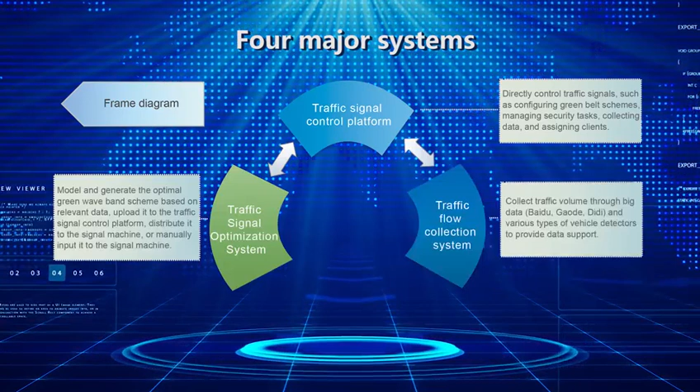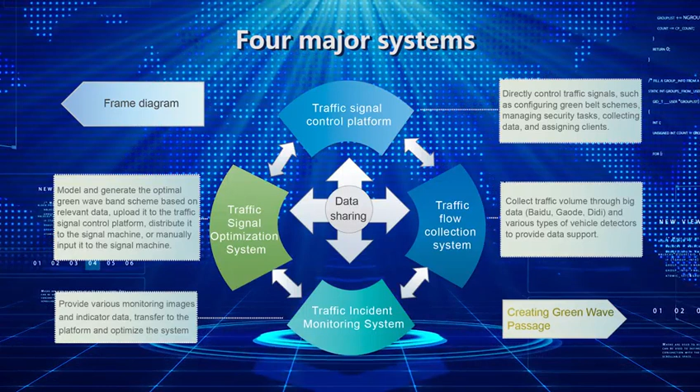The 4 major systems are the Big Data Traffic Signal Control Platform, namely the Super Signal Control System, Regional Coordination Signal Optimization System, Traffic Flow and Green Loss Collection System, and Traffic Event Monitoring System. These 4 systems can be purchased separately for independent operation and use, or can be purchased together for shared database comprehensive use. Our 3 main products are Big Data Traffic Signal Machines, Video Vehicle Detectors, and Leishi Integrated Machines. Some of the products have reached the leading level in China.

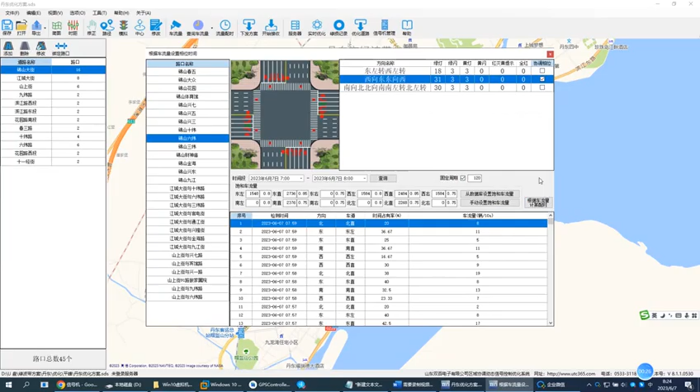Today, we will focus on introducing the Urban Regional Coordination Dynamic Signal Control Optimization System, abbreviated as the Regional Coordination Signal Optimization System, to all leaders. The main function of this system is to analyze the traffic flow at each intersection and on the road, as well as the green loss time at each intersection, generate a reasonable timing plan and send it to the traffic signal, in order to enable vehicles traveling on each road in the urban area to pass in a bidirectional green wave.

This system is developed using cutting-edge core technologies such as advanced 3-dimensional traffic coordinates, green wave phase locking, time misalignment of vehicles passing through intersections, and spatial misalignment of vehicles passing through intersections. Our company's Regional Coordination Signal Dynamic Optimization System has reached the leading level in China, that is, the first level in China, and has passed the appraisal of national scientific and technological achievements.

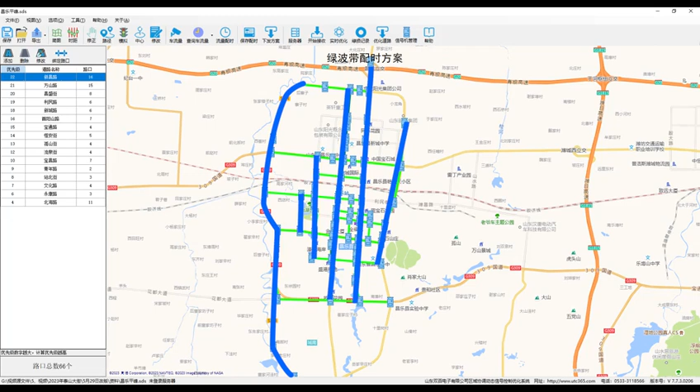This system models various intersections on urban roads to achieve a green light start and green light passage for vehicles, allowing each road in the urban area to achieve bidirectional green wave passage, that is, east-west road bidirectional green wave passage and north-south road green wave passage, implementing a 4-way green wave zone at road intersections. At the same time, this system can also combine the traffic flow and green loss data at various intersections to achieve dynamic green wave zones.

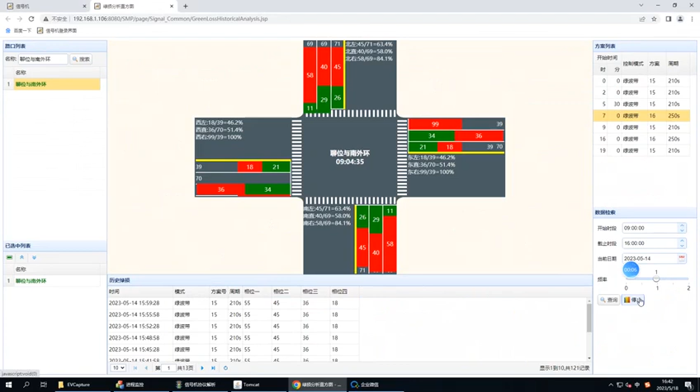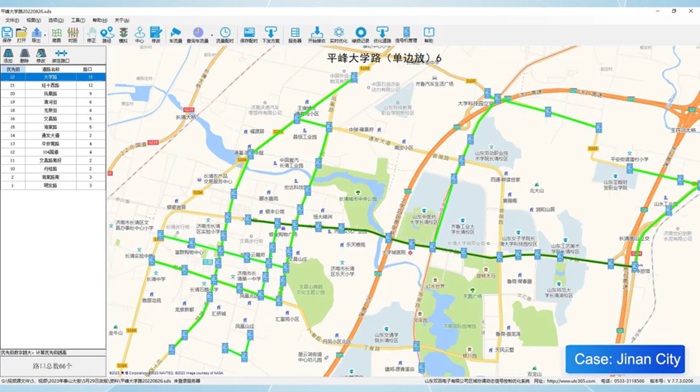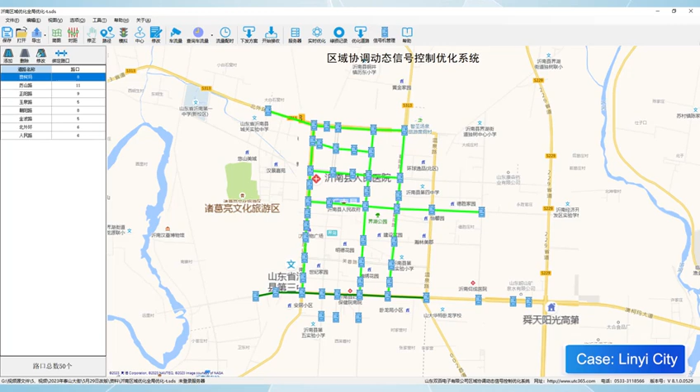This system fundamentally solves the problem that some manufacturers can only adjust parallel roads when debugging green wave belts. Once the roads intersect, it is impossible to achieve green wave traffic, that is, it fails to coordinate the intersection points of each green wave belt road, and therefore cannot achieve true regional coordination. At present, there are many manufacturers on the market that do green wave belt tuning, and some manufacturers use individual adjustments at each intersection, resulting in poor linkage.

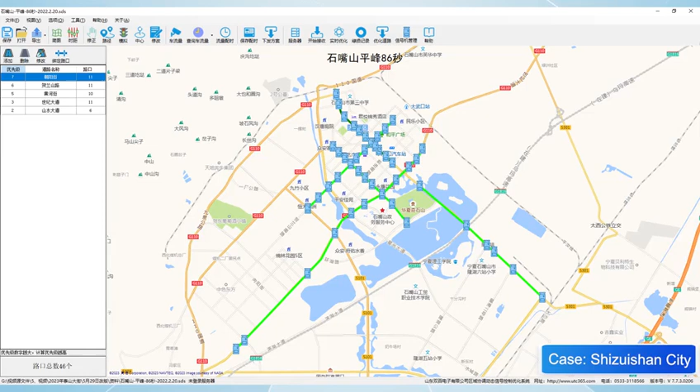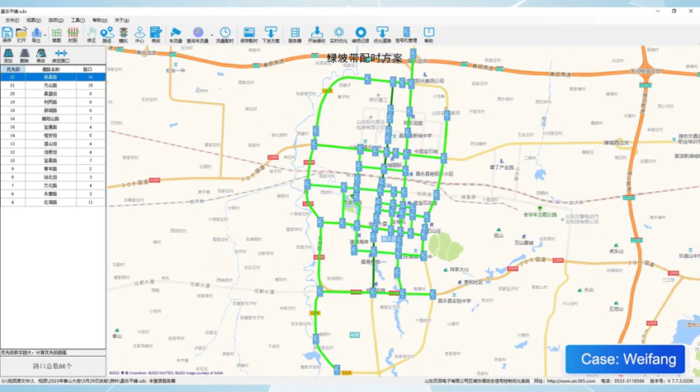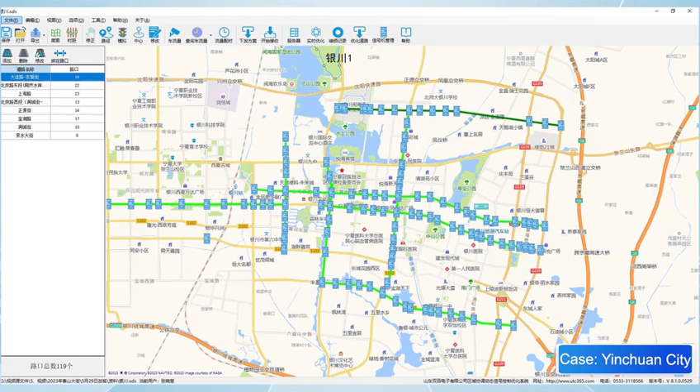Alternatively, only a few intersections can be done, and increasing the number of intersections makes it difficult to achieve green wave optimization, resulting in high tuning costs and unsatisfactory results. Alternatively, only parallel road sections can be optimized, and cannot solve the optimization of intersection road sections. The Regional Optimization System of Shandong Shuangbai can dynamically optimize from road sections to sub-areas, and then to regions, ultimately achieving green wave traffic throughout the entire region and maximizing traffic efficiency at each intersection.

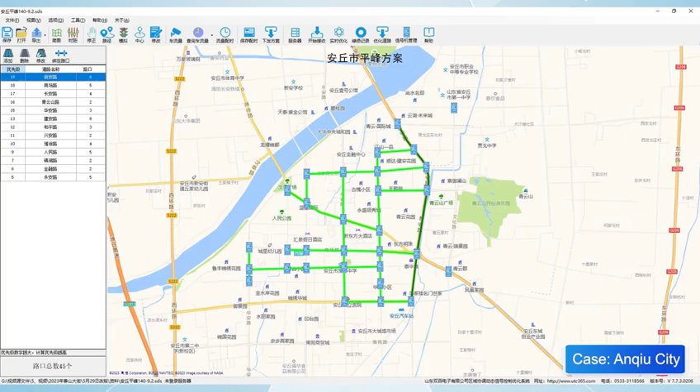Now let's take a look at our tuning system. We will introduce this system from 7 main aspects. First, modeling of intersections within urban areas. 2. Basic data research. 3. Regional signal optimization calculation. 4. Verification of the plan. 5. Distribute the plan and generate a timing file. 6. Plan road testing and data collection.

7. Save timing files. Firstly, let's take a look at the functionality of the first module, which is the intersection modeling function in urban areas. Taking the 5 intersections of Mount Taishan Avenue as an example, we will mark and file the intersections to be optimized on the GIS map in turn, based on the current actual operating phase input into this system.

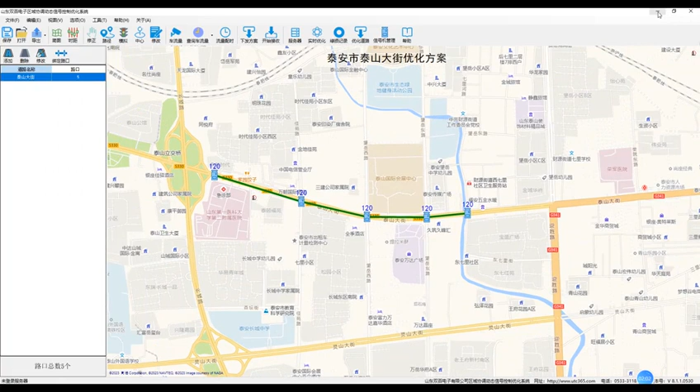Let's have a look. This is the file of each intersection that we have established. The scheme configuration of the intersection between Mount Taishan Avenue and the affiliated hospital. This is the scheme configuration of the intersection of Mount Taishan Avenue and Jiayuan Road. This is the scheme configuration of the intersection of Mount Taishan Avenue and Wangyue West Road. This is the scheme configuration of the intersection of Mount Taishan Avenue and Wangyue East Road.

This is the scheme configuration of the intersection of Mount Taishan Street and Newspaper Building. After marking the 5 intersections, the system automatically calculates the distance between each intersection.

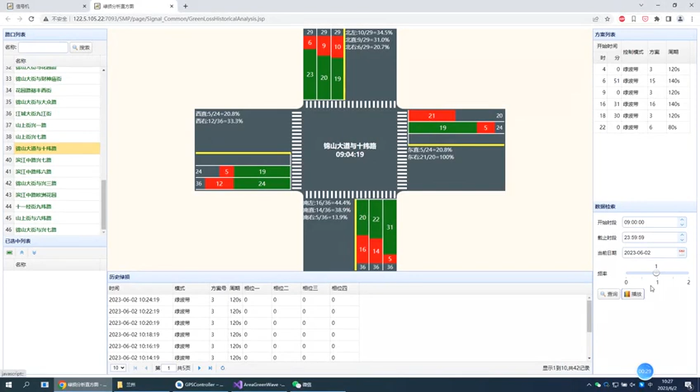Let's take a look at the second part of the system's functions, basic data research. Research the current green loss data of each phase at each intersection, rationalize the release time, cycle, and driving speed.

We collect the green loss data of each phase at each intersection through a green loss collection system, or control the green loss of each phase within a reasonable range through on-site observation and other methods, while determining the unified green wave cycle of the entire road. Determine the actual driving speed of the road through our road testing terminal.

We will continue to look at the third part of the system's function, regional signal optimization calculation. Generate reasonable timing schemes and phase differences. This system comes with multiple optimization strategies for users to choose from, including priority-based calculation, region-by-region calculation, green wave optimization strategy, and automatic green wave optimization strategy. We can choose and use them according to actual needs.

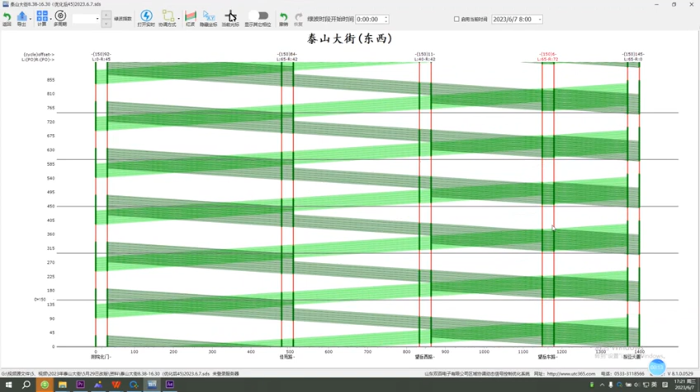This part of the function is the core of this system, and the core is the algorithm, with each strategy corresponding to a different algorithm. After selecting the corresponding strategy to automatically generate the solution, we can also manually adjust it. Adjust the phase difference by dragging the green pillars at each intersection up and down to achieve bidirectional coordinated green wave traffic. At this point, we import the simulation trajectory.

This trajectory is generated based on our measured driving speed, observing whether it happens to pass through each intersection at the green light state. We can observe whether the setting is reasonable and feasible by moving the trajectory up and down.

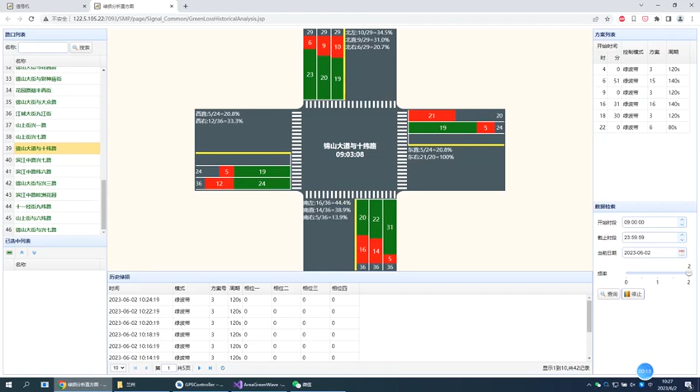At the same time, this system can also interface with the green loss collection system to achieve dynamic adjustment and distribution of solutions. The green loss collection system can be achieved by analyzing the auxiliary code stream of existing electronic police cameras. This is our green loss collection system. The video vehicle detector uses the existing electric alarm equipment at the intersection as the collection terminal to collect the traffic volume covered by the monitoring camera.

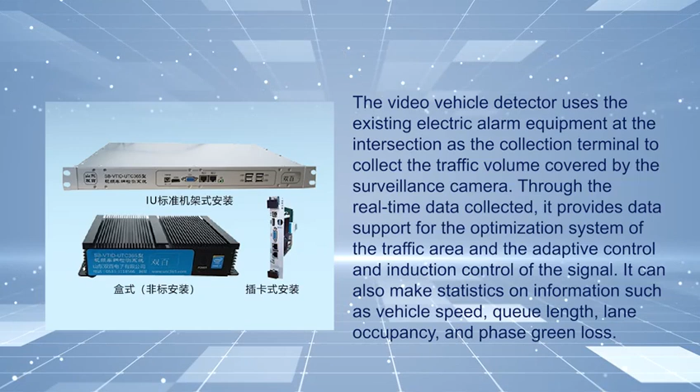Through the real-time data collected, it provides data support for the optimization system of the traffic area and the adaptive control and induction control of the signal. It can also make statistics on information such as vehicle speed, queue length, lane occupancy, and phase green loss.

Easy installation, no need to rewire for construction, just borrow the resources of intersection police and checkpoints. No relay equipment required. Local data storage, upload independent of signal machine, and can be installed independently. The detection rate is as high as 99.3%. Tested by the Traffic Safety Product Quality Supervision and Testing Center of the Ministry of Public Security. It can connect with other brands of signal machines and monitoring camera equipment in the industry.

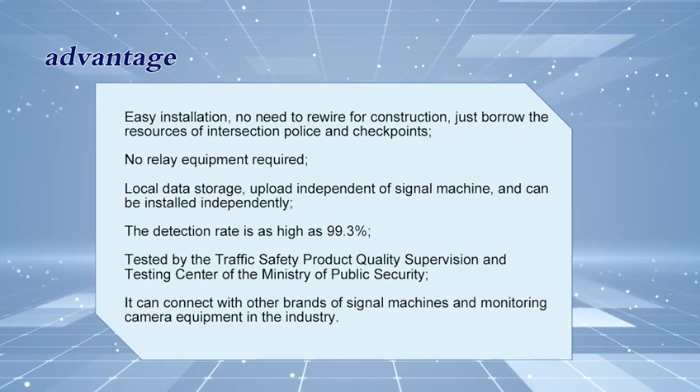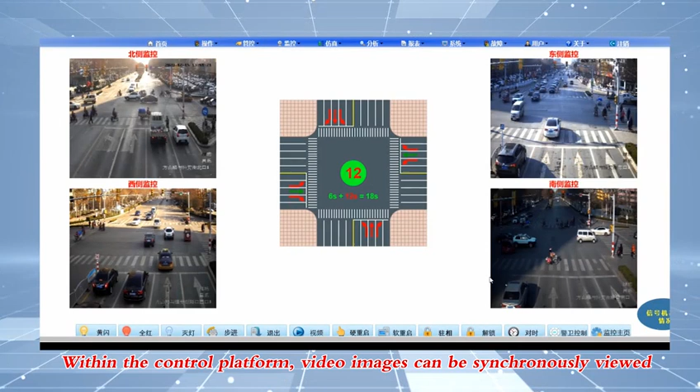The fourth part is the verification of scheme rationalization. We find the driving trajectory in the time-distance graph interface. Click with the mouse to check whether the actual driving speed in the blue actual driving trajectory matches the setting.

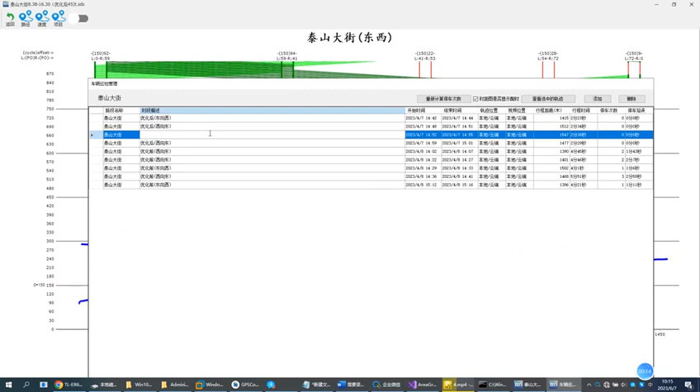We observe whether there is periodic interruption in the time-distance graph, whether it passes through underpasses, elevated roads, etc., and adjust the coordination phase according to actual needs. For example, for underpasses, elevated roads, etc. At intersections, we can incorporate left turn signals into green wave coordination.

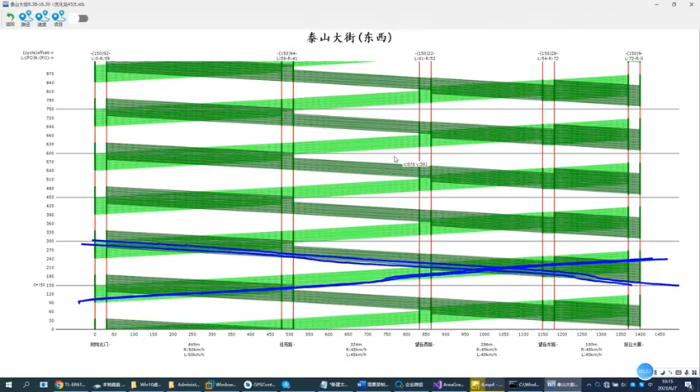This is our regional coordinated road testing equipment, which can collect the driving speed, coordinates, driving videos, etc. of the green wave belt. This is our green band calibrator, which can verify whether the green band effect is accurate and whether it operates according to the set plan. It can be installed on a mobile phone or computer to verify the accuracy of the operation plan at each intersection on site.

The fifth part is to distribute the plan and generate a time allocation file. The time allocation plan optimized through regional coordination can be automatically distributed to traffic signals.

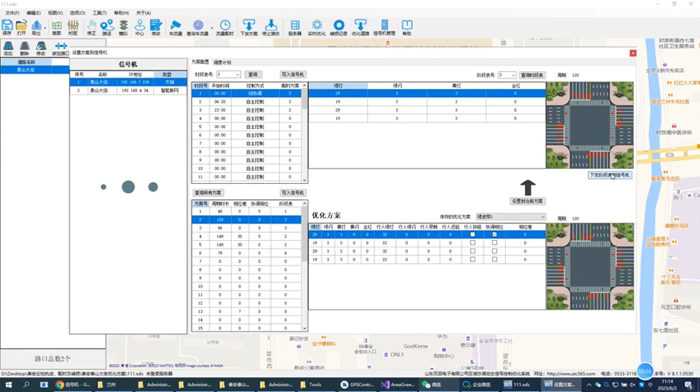Able to automatically issue signals from various brands based on protocols.

The sixth part is the solution road testing and data collection. After the optimization system is issued with the plan, we need to verify whether it meets the actual traffic conditions by collecting data from the road test terminal. For whether the optimized timing plan can truly achieve all green wave traffic, we have also equipped a 4-in-1 verification system to verify whether the regional coordination green wave meets the actual situation through real and immutable data.

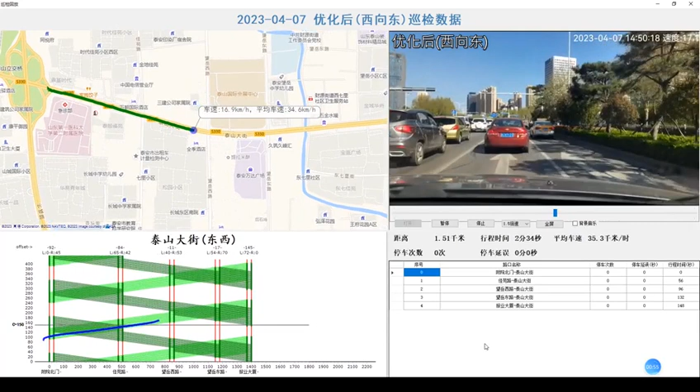The lower part of each green bar represents the start time of the green light, and the upper part represents the end time of the green light. The blue smooth curve represents the actual driving trajectory of our vehicle. As long as our blue driving trajectory passes through the green bar, it represents that the vehicle passes through the intersection in a green light state. In practice, the blue driving trajectory is the data automatically collected by our vehicle during actual driving, and there is no possibility of manual falsification.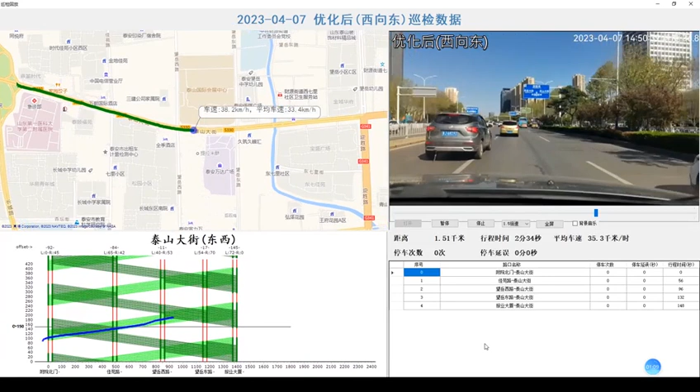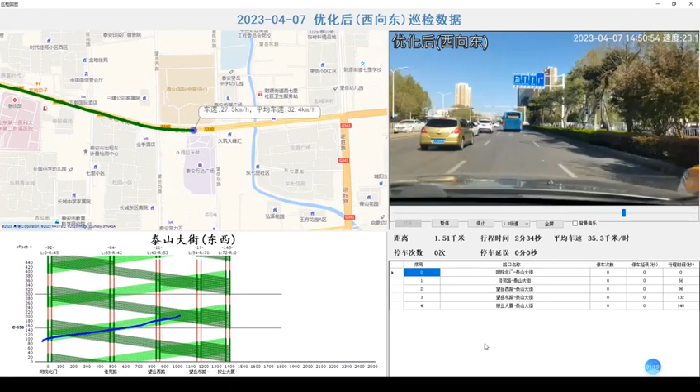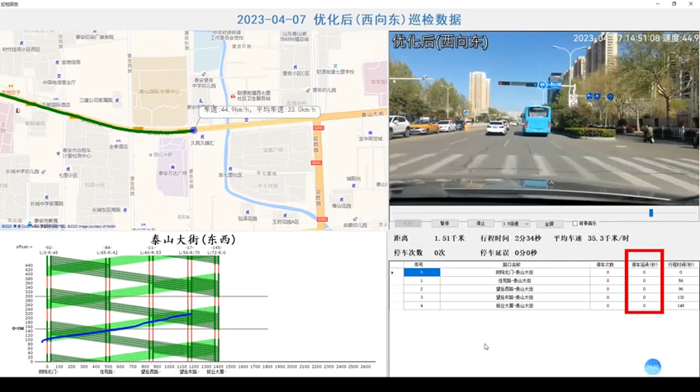Please watch the video on the right side of the screen. This is a video footage recorded by our road test terminal vehicle during actual driving, which includes our actual driving time, speed, and images of passing through various intersections. At the bottom right is our optimization data, which clearly shows our optimized parking times, whether to stop at each intersection, driving time, and so on.

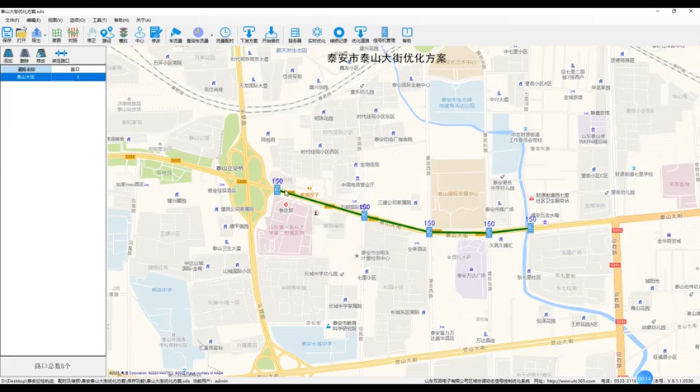The seventh part is the preservation of timing files. The optimization system can save the optimization of the entire urban area as a file, which can be opened for further optimization or retrieval in the future. Configuration schemes can also be exported and archived in a spreadsheet format.

Our company corrects and explains the following erroneous views that some personnel may be misled by the propaganda of other units. First, on the green wave road, there is always a red light after encountering a red light, that is, the red wave zone. Second, it is impossible to achieve a bidirectional green wave band. Third, it is impossible to achieve a four-way green wave zone, that is, a crisscross green wave zone cannot be achieved. Fourth, without automatic flow collection data, it is impossible to achieve a green wave band.

In response to the first scenario of encountering a red light on a green wave road, and remaining at a red light, known as the red wave zone, let's take a look at the green wave time interval chart. We start at the green light at the first intersection and drive down to the next intersection, starting at the bottom of the green bar. If we stop and wait until the next green light time starts due to other reasons, we start driving again according to the setting of the green wave band, starting from the lower end of the green column. That is to say, if we miss this green wave band, we can drive on the next green wave band and achieve all the green lights.

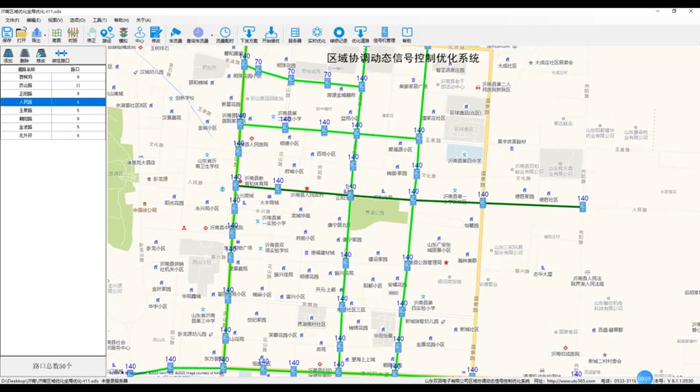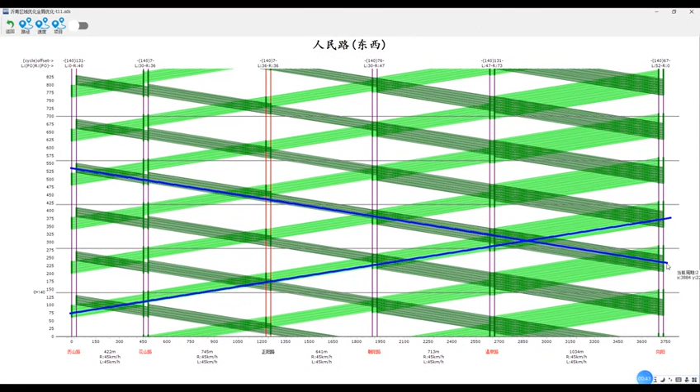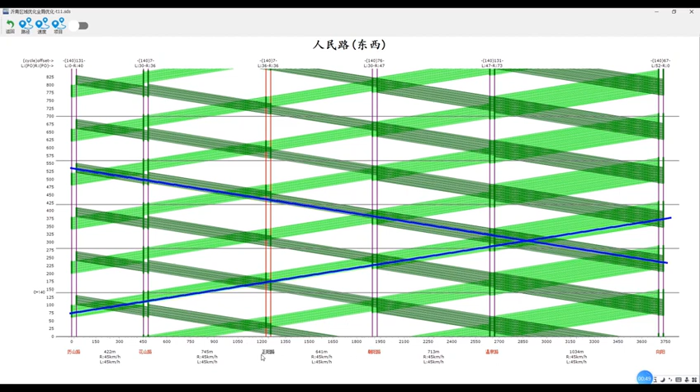Let's take a look at the coordination direction interface. Zhengyang Road coordinates the north-south direction. Let's zoom in and take a look at the time distance map of Renmin Road again. Okay, we can see that whether viewed from left to right or right to left, the blue driving trajectory shows two-way green wave traffic. We need to pay special attention to Zhengyang Road and Renmin Road. When vehicles pass through this intersection, it is two-way green wave traffic in the east-west direction. Let's take a look at the coordination direction interface, and Renmin Road coordinates the east-west direction.

By looking at these two time distance maps, it is possible to achieve a green wave zone in 4 directions at an intersection, as the north-south passage passes through Renmin Road and Zhengyang Road in a bidirectional green wave passage, while the east-west passage passes through Renmin Road and Zhengyang Road in a bidirectional green wave passage. This is calculated by us through cutting-edge core technologies such as advanced 3-dimensional transportation coordinates, green wave phase locking, and vehicle spatial misalignment, which has certain scientific principles.

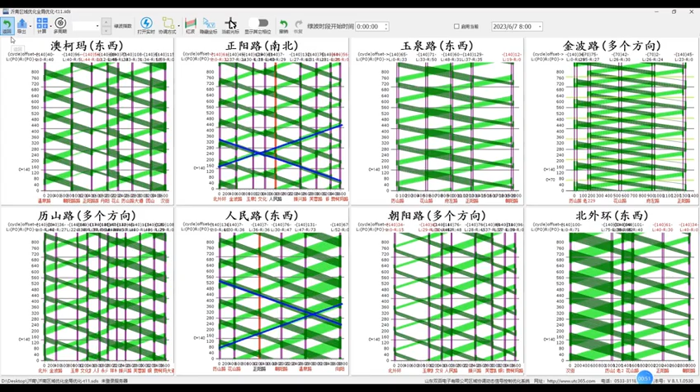In response to the fourth situation where without automatic traffic collection data, it is impossible to achieve a green wave band, we need to first take a look at the 4 major elements of the green wave band: rationalized same or multiple cycles, clock consistency, consistent time periods, and rationalized phase difference. Compared to the green wave theory, the flow mainly determines whether the release time of each phase is reasonable and whether green loss phenomenon will occur, thereby determining the reasonable release cycle.

If there is no flow detector, we can also determine the release cycle and reasonable release time for each phase through manual observation or long-term statistical methods. Therefore, it can be said that without automatic flow collection data, a green wave band can also be achieved.

This system also has many other functions, such as real-time optimization, green loss statistical analysis, multi-period scheme setting, dual-cycle green wave, non-identical dual-cycle green wave, asymmetric signal release green wave, overlapping green wave, asymmetric vehicle flow green wave, asymmetric vehicle speed green wave, red waveband setting, unidirectional green waveband setting, and many other highlights that will not be further elaborated here. In the later stage, we can learn more about optimization knowledge through practical operation of this optimization system.

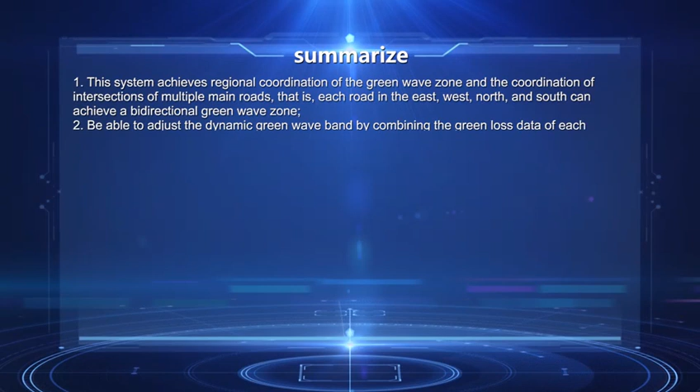Through the above display and introduction, we summarize as follows. First, this system achieves regional coordination of the green wave zone and the coordination of intersections of multiple main roads, that is, each road in the east, west, north, and south can achieve a bidirectional green wave zone. Second, it is able to adjust the dynamic green wave band by combining the green loss data of each intersection. Third, it has the ability to collect real driving data and verify whether the setting of the green wave zone is reasonable and feasible. Fourth, it is able to connect with traffic signals from multiple brands and achieve automatic distribution of solutions.

Fifth, it is able to generate regional dynamic coordination schemes based on green loss data, achieving regional coordination control. Sixth, to improve optimization efficiency, the road test terminal usually generates a reasonable green wave band timing scheme by collecting twice. Seventh, it has saved a lot of manpower and material costs, improved optimization efficiency and accuracy, and broken the bottleneck phenomenon of only being able to set parallel green wave bands. Eighth, the Urban Regional Coordination Dynamic Signal Control Optimization System is at a leading level in China and has obtained relevant scientific and technological achievements appraisal reports.